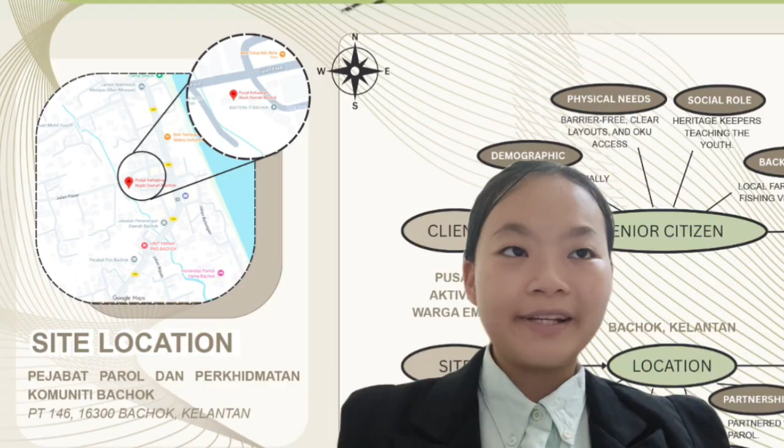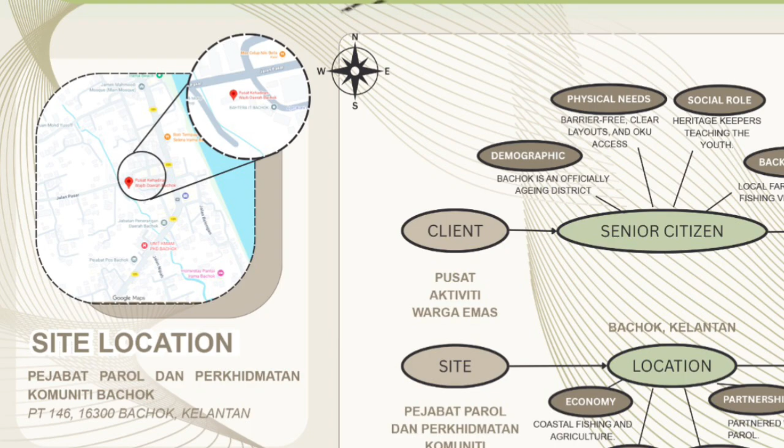Today I am proud to present my project, The Resonance of Life, a proposed Pusat Aktiviti Warga Emas, PAWE, located in the culturally rich landscape of Kelantan. Our site is at the heart of Bachok, Kelantan. Here, it's near the Pusat and the facilities in Bachok. My client is Pusat Aktiviti Warga Emas.

As designers, we often look at the built environment through the lens of modern progress. However, this project addresses a critical demographic shift, our aging population, and the profound need for spaces that foster dignity, community, and active aging. This facility is envisioned as a multi-generational

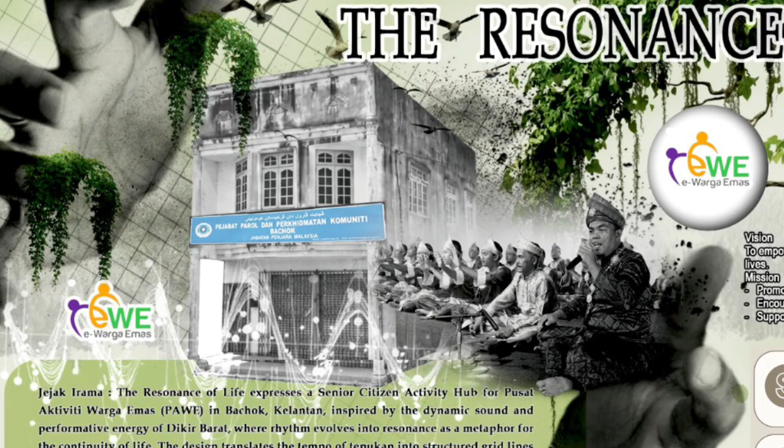community-led oasis. Our conceptual framework anchors on eco-futurism and advanced computational engineering seamlessly blended into the cultural heritage of Kelantan. By doing so, the design establishes a rhythmic dialogue between nature, human interaction, and traditional performance. The name, The Resonance of Life, represents a continuous, echoing relationship between the building's users, the natural elements, and the community at large.

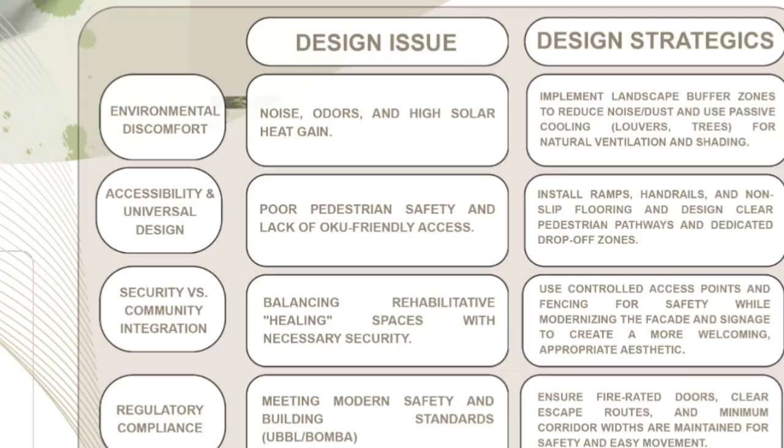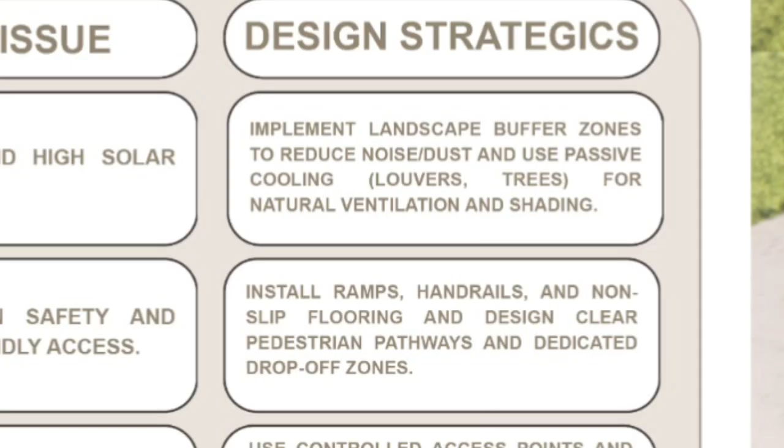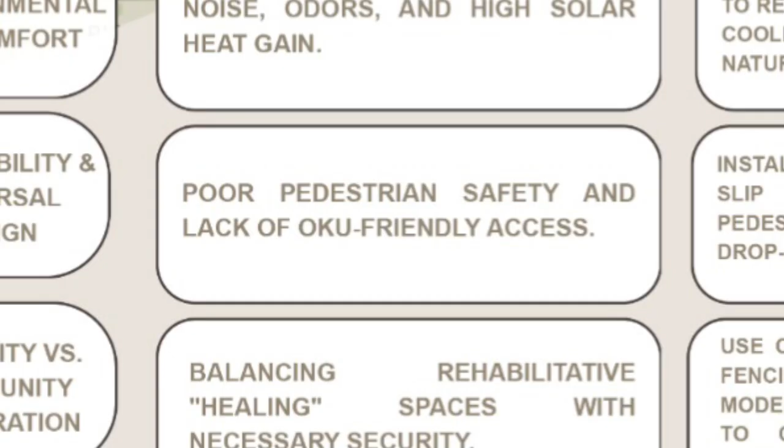Design issues and design strategy. For the design issue, there is environmental discomfort because the Pusat and the facilities are nearby, so there is noise, odor, and high solar heat gain. So we propose to implement landscape buffer zones to reduce noise and dust, and use passive cooling, louvers or trees for natural ventilation and shading. Accessibility and universal design: poor pedestrian safety and lack of OKU-friendly access. The strategy is to install ramps, handrails, and non-slip flooring, and design clear pedestrian pathways and dedicated drop-off zones.

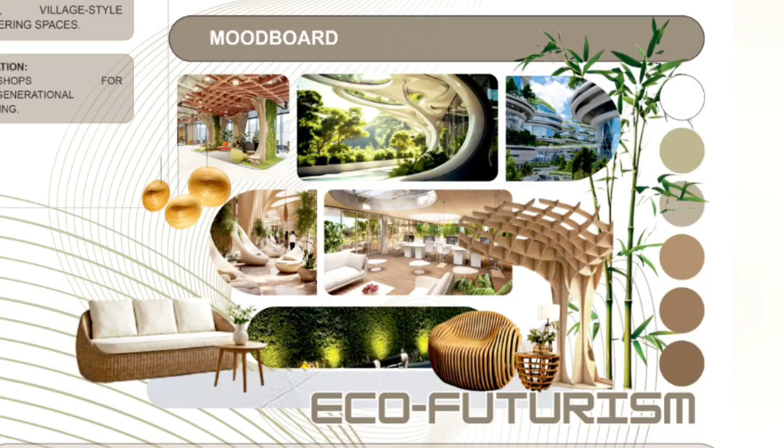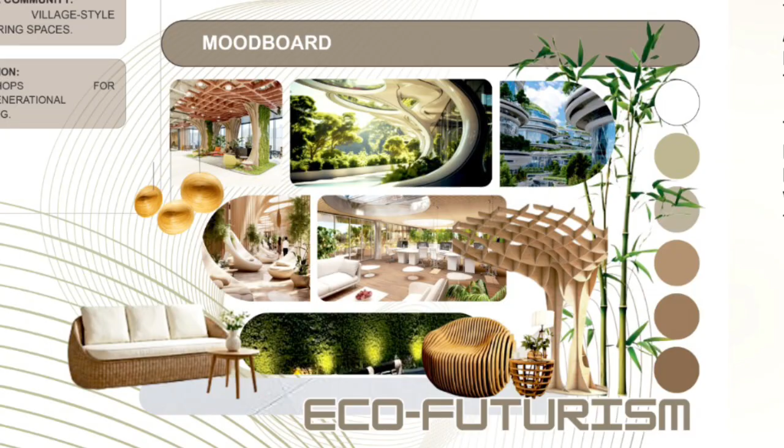Moving into our mood board, we're using natural colors, which are white, green, and brown. That is our main color scheme. In interior furniture, we're using bamboo and also parametric timber. I chose bamboo because it is flexible and easy to curve into organic shapes, mimicking the sound wave, and it is easy to find in Kelantan. The parametric timber wood can create curved shapes and also grid shapes, as in my conceptual model. Tempered glass was chosen because it can connect the people inside with the exterior landscaping.

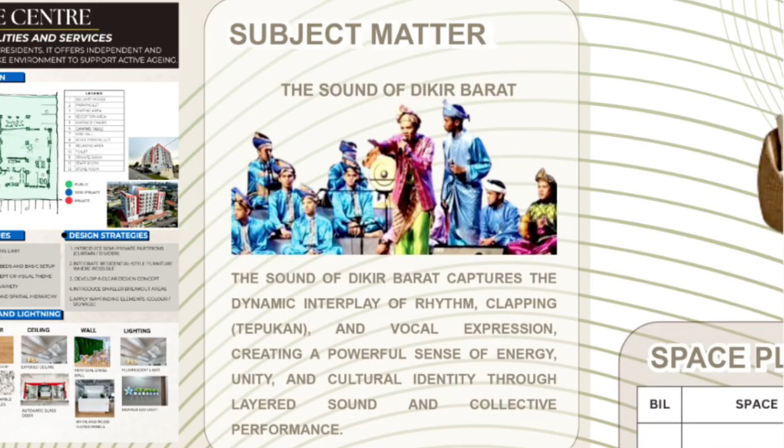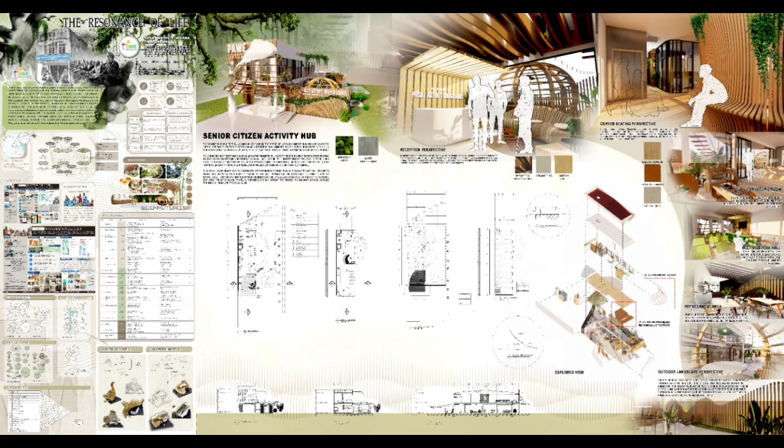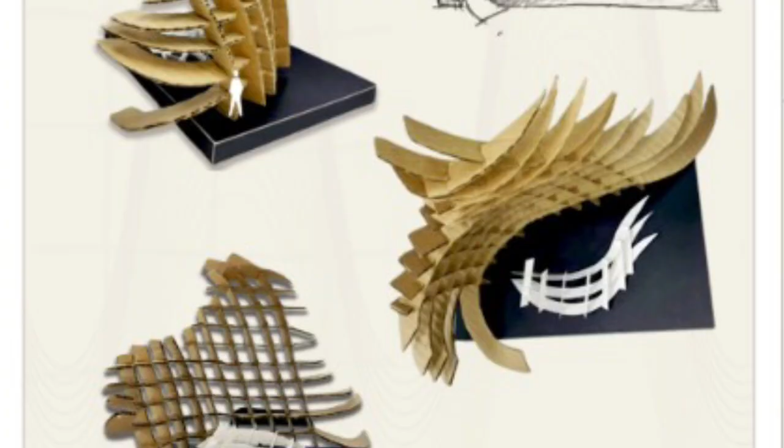My subject matter is the sound of Dikir Barat. The sound of Dikir Barat captures the dynamic interplay of rhythm, clapping, tepukan, and vocal expression, creating a powerful sense of energy, unity, and cultural identity through layered sound and collective performance. To truthfully ground the Resonance of Life in Kelantanese culture, the physical form of the building is derived directly from the intangible heritage of traditional performance. Especially, we look at the ritual of rhythm, translating the physical and acoustic energy of clapping into structural architecture.

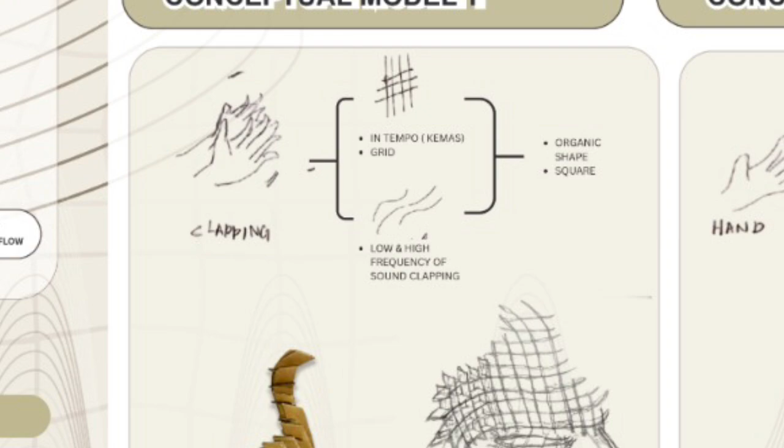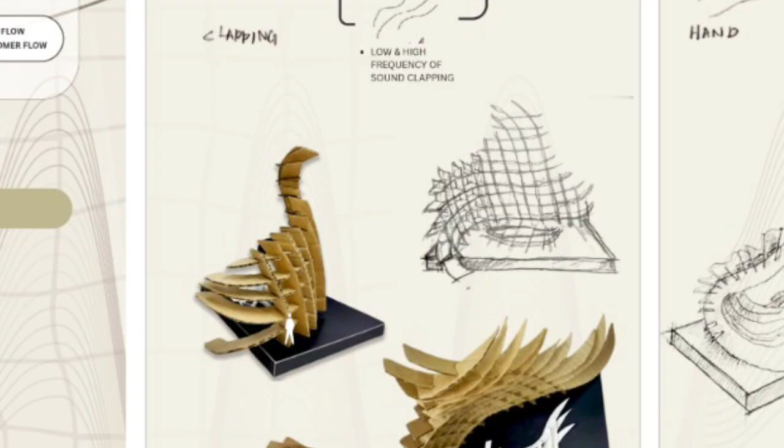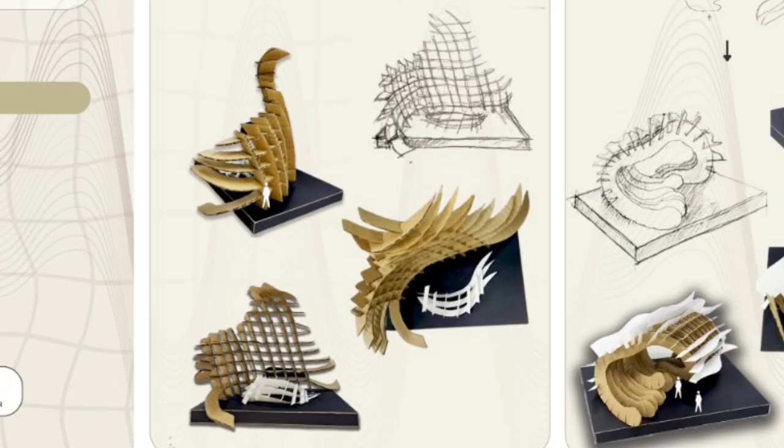In conceptual model 1, we map the low and high frequencies of sound waves from clapping onto a structural grid. This captures the concept of in-tempo atau kemas, creating a dynamic field composition where organic layered timber ribs manipulate spatial depth to mimic the rising and falling cadence of music.

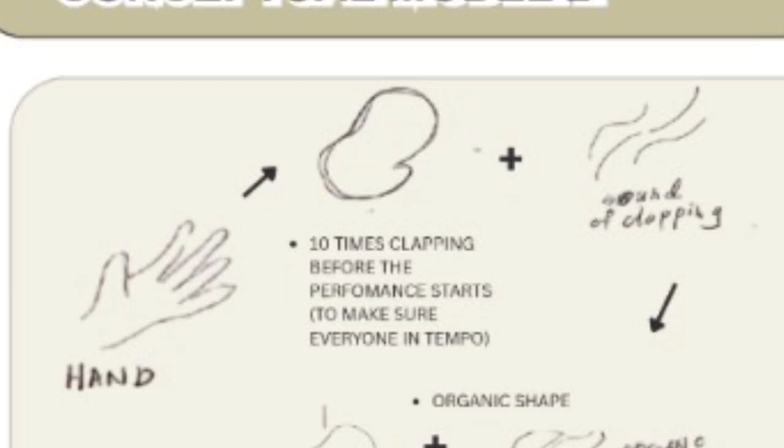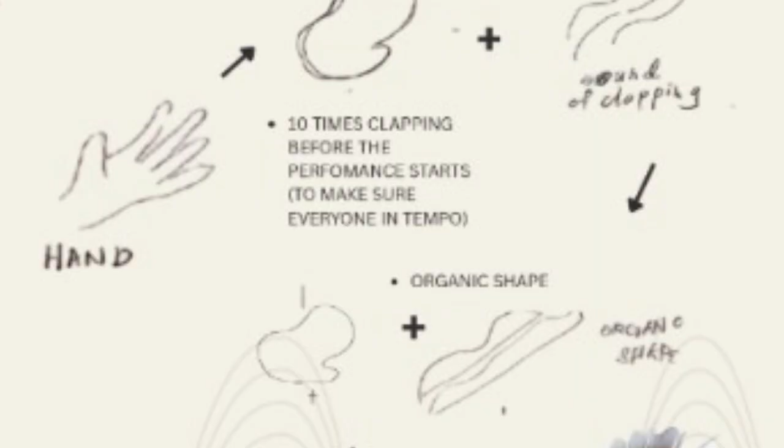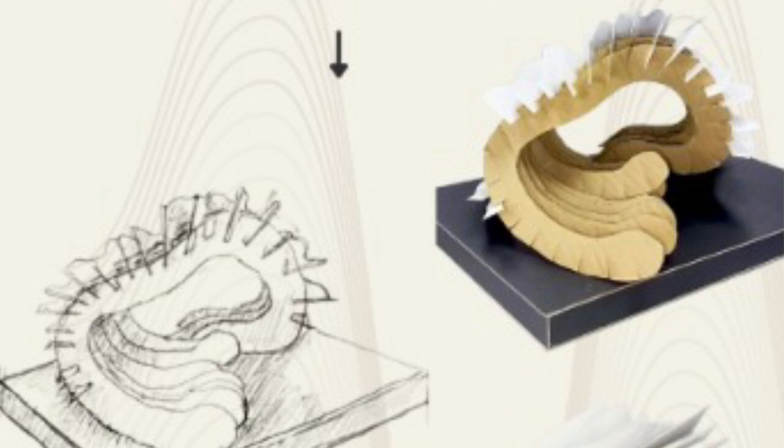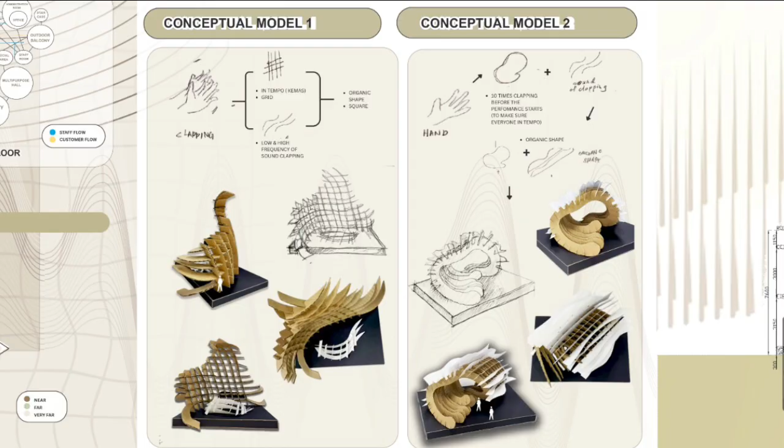In conceptual model 2, we focus on the performance ritual where dancers clap 10 times before a performance starts to synchronize their tempo. We extracted the form of the cupped hand and the unfolding path of a sound wave. This generated a sweeping organic shell structure wrapped in a rhythmic series of timber arches and a white skin. These two models directly dictate our final building envelope, turning the invisible resonance of cultural performance into an eco-futurism shelter.

For our case studies, we have Harvester Care Center and Joo Chiat Social Club. Joo Chiat Social Club has also faced the same issue. It is a good case study.

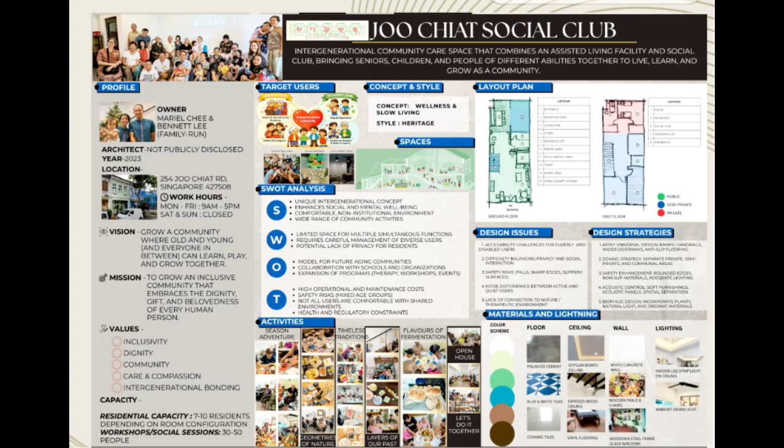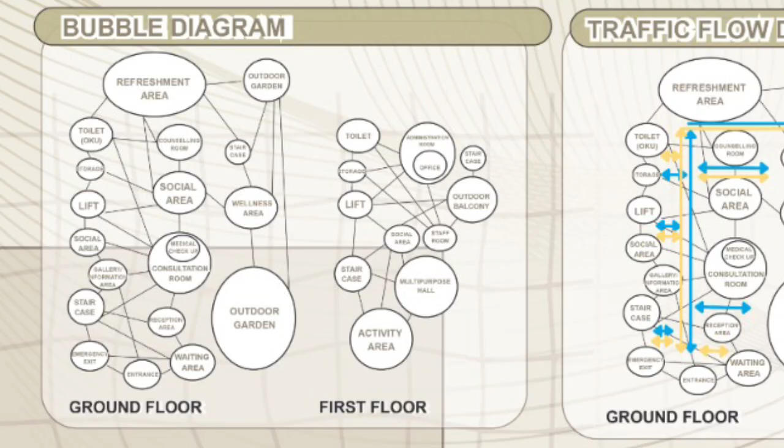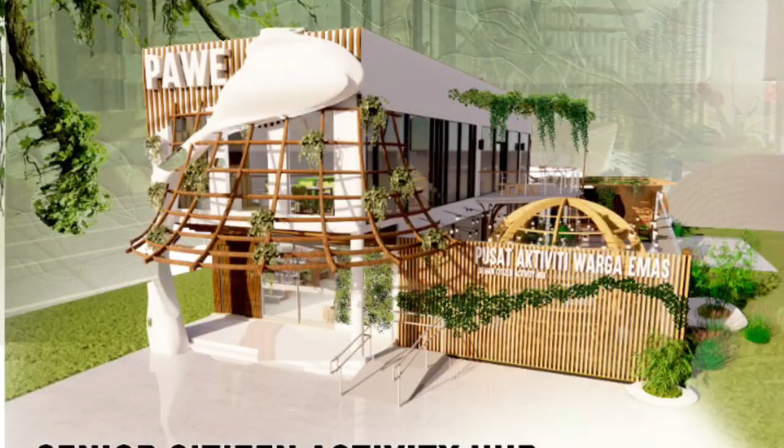Moving into the physical architecture, let's explore the Senior Citizen Activity Hub. The design addresses the spatial experience starting right at the entrance porch threshold. Vehicle access is positioned right at the front of the building, where visitors can park directly in front of the primary entrance or use the dedicated drop-off zone.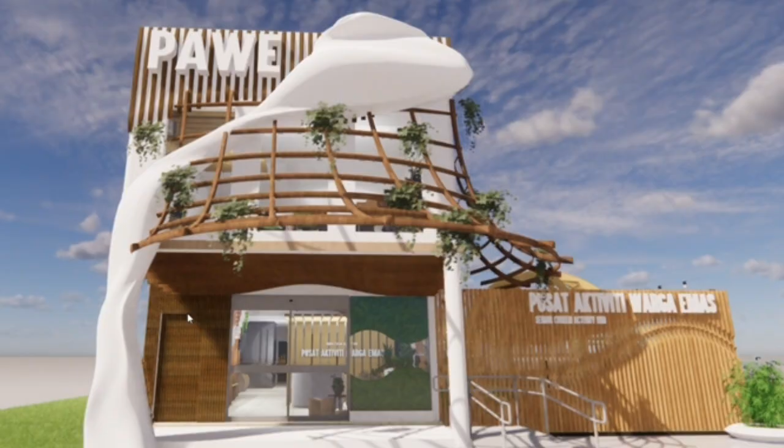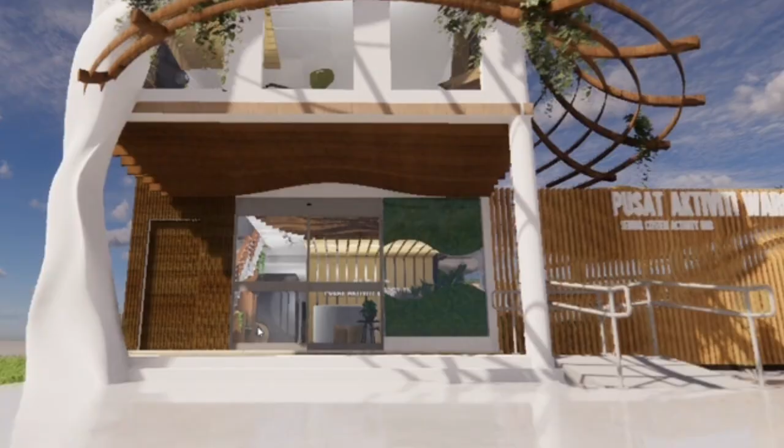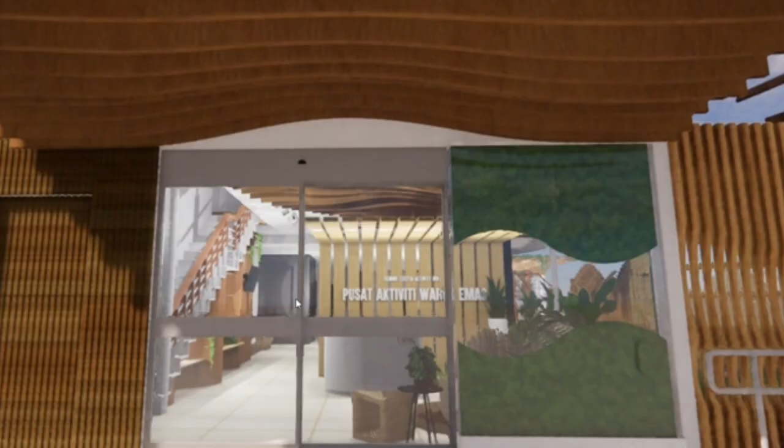Here, the immediate transition threshold is defined by our parametric timber acoustic damping zone. The moment a visitor drops off and steps out, they are introduced to our first spatial exhibition, a curated side niche showcasing intricate, computationally optimized parametric timber work that creates a rich sense of architectural depth.

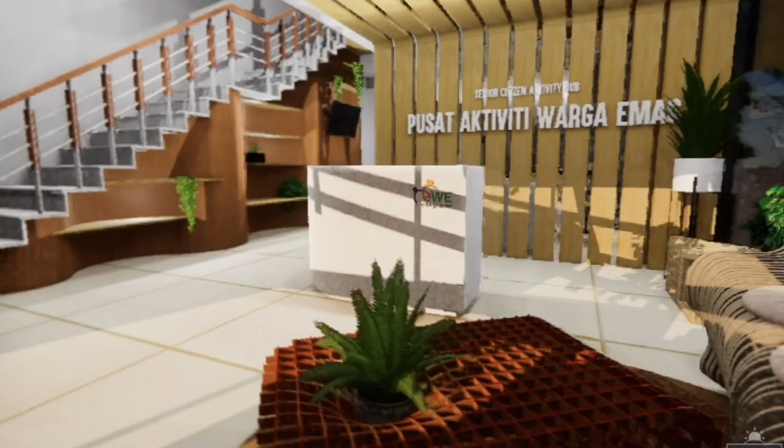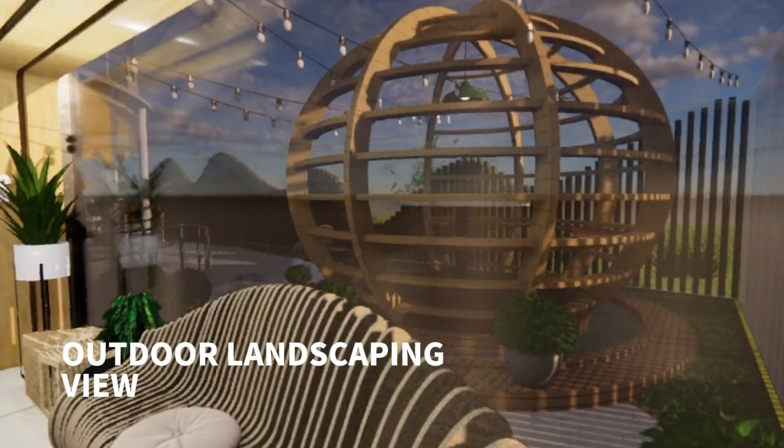Looking straight ahead from the entrance, the visual axis lands directly on the reception area. Positioned on this side is a dedicated waiting zone right in front of reception. While sitting here, visitors can directly see through the gallery information wall with full height tempered glass, letting them look straight up to the beautiful landscaping and blurring the boundaries between interior and exterior environments.

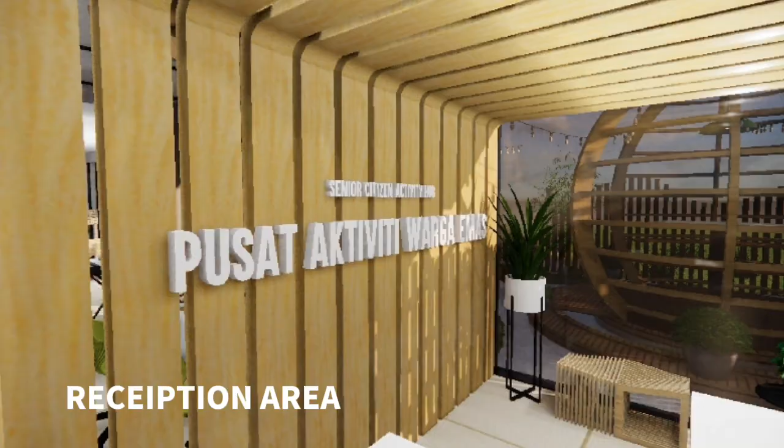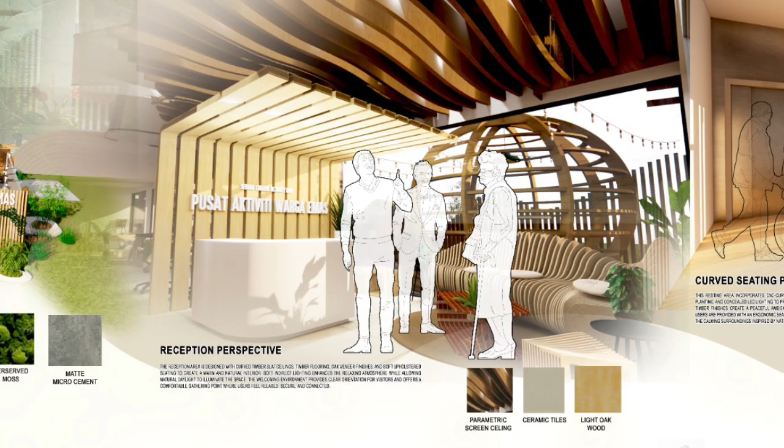The timber slat system behind the reception table also acts as a partition, strategically separating the public reception from the medical checkup and consultation room. The workflow here is highly efficient: visitors check in at reception and can immediately complete a medical checkup right next door, while waiting to proceed into their formal consultation with the doctor, sitting comfortably. While this medical zone requires a certain level of privacy, it is designed to feel open and welcoming rather than cool and clinical.

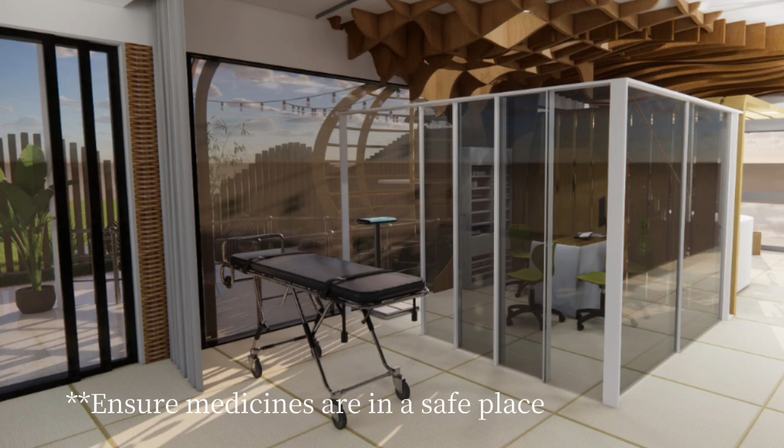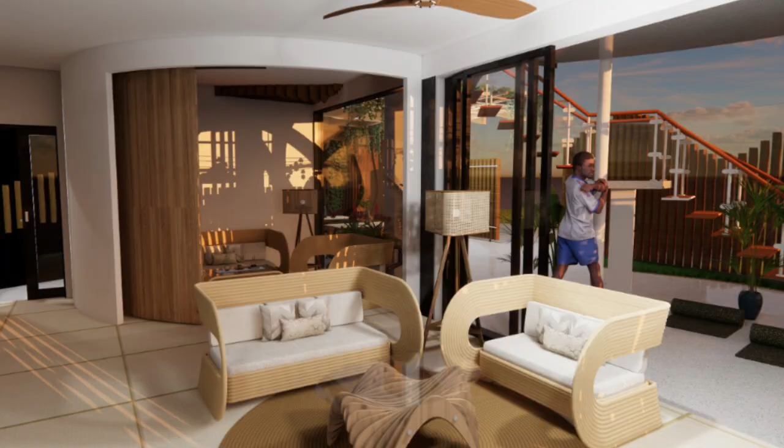Moving to our social area, this space is directly connected to the wellness area. We have integrated a large sliding door system so that when fully opened, the two programs merge into one massive, continuous social landscape. For vertical accessibility, a passenger lift is located right here.

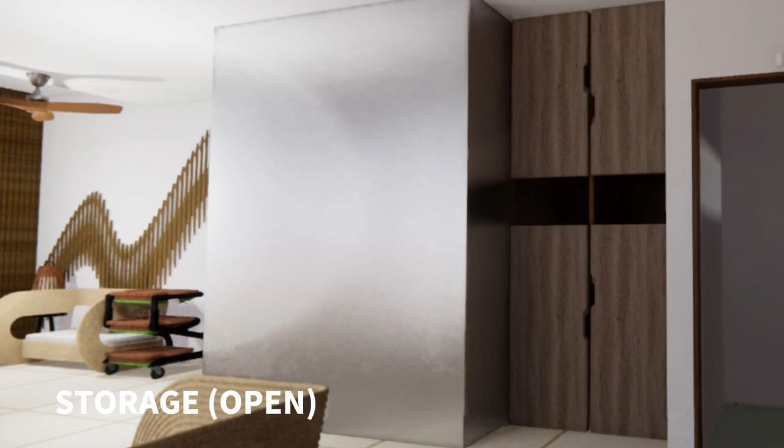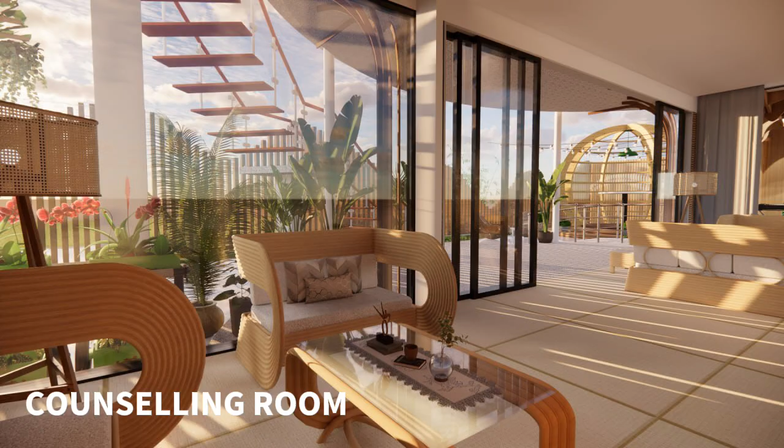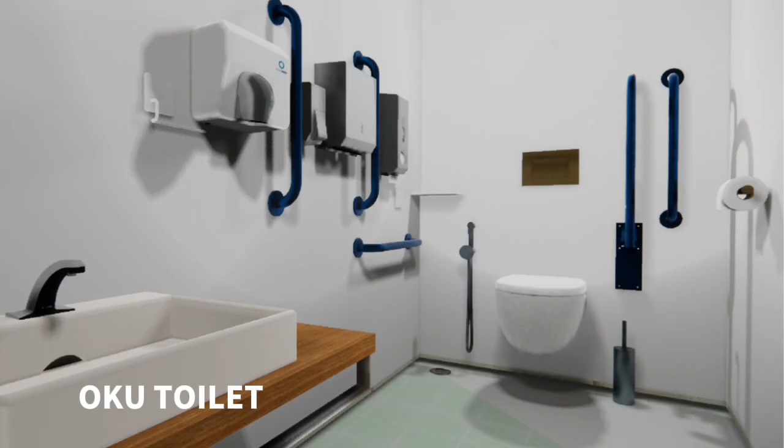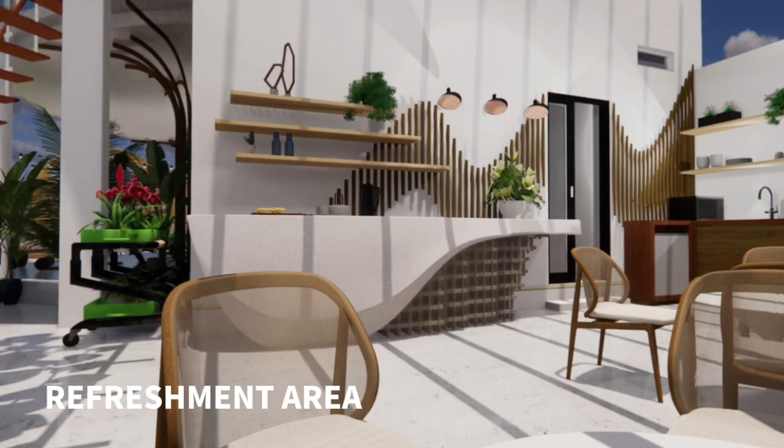Finally, the straight traffic flow brings us to the rear of the building, opening up to the refreshment area. For the operational staff, we have included a compact, highly functional pantry equipped with a microwave, refrigerator and mini refrigerator, and a dedicated service counter for food preparation and coffee brewing. The dining area itself features a dynamic layout with a mix of high counters and standard dining tables.

Adjacent to this, we have another transition zone. Visitors can sit here, enjoy a coffee, and look directly to the landscape.

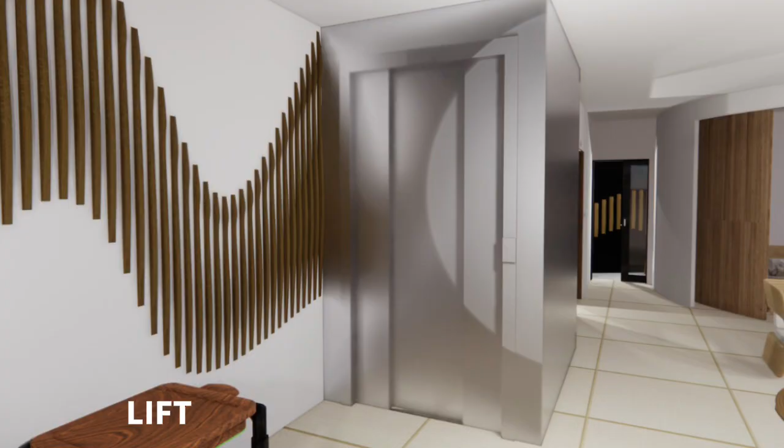Transitioning to the first floor, vertical circulation is provided by the central staircase and a passenger lift core. Both are framed by identical parametric timber curve seating, ensuring a cohesive aesthetic for all senior citizens. Behind this curved greeting zone is a private staff room for the administrative team.

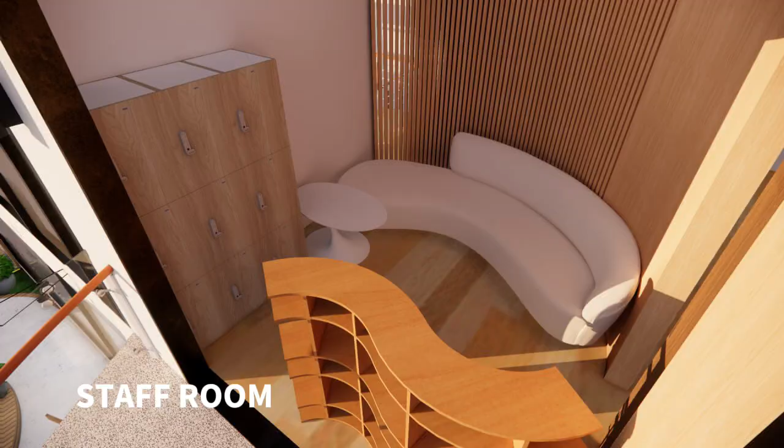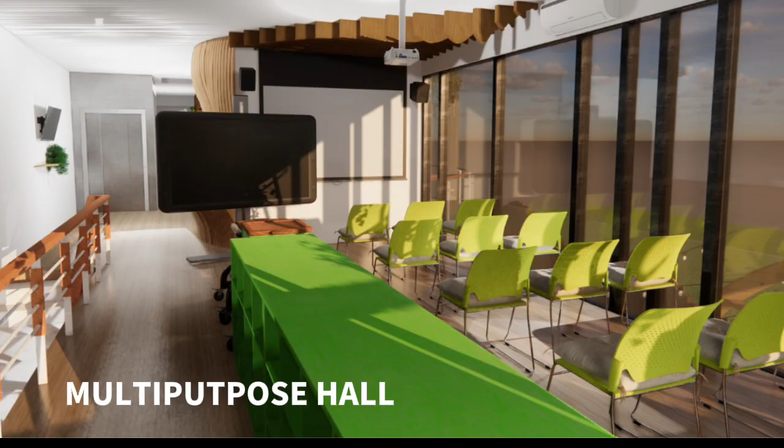The core of this floor opens into an expansive, flexible, multi-purpose hall anchored by a dedicated projection area for viewing videos and cultural films. They also provide talks and workshops.

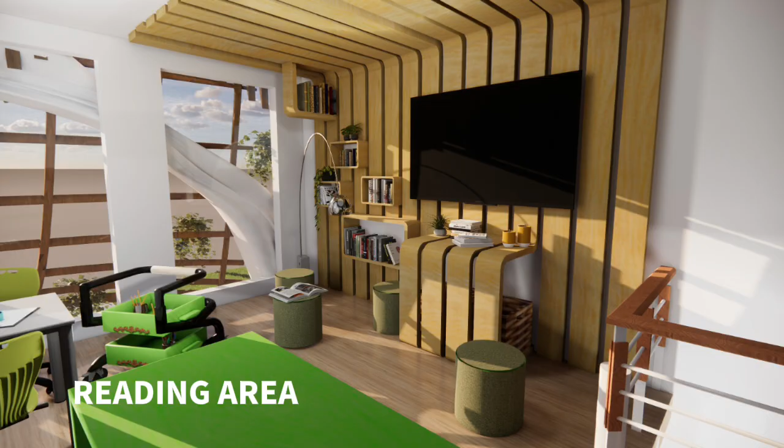Adjacent to this, the activity area splits into a reading zone with a lined parametric wall and a crafting zone featuring custom modular tables and a mobile storage trolley. A floor-to-ceiling parametric bamboo screen system embedded with hidden LED strips and climbing plants ties this creative zone together.

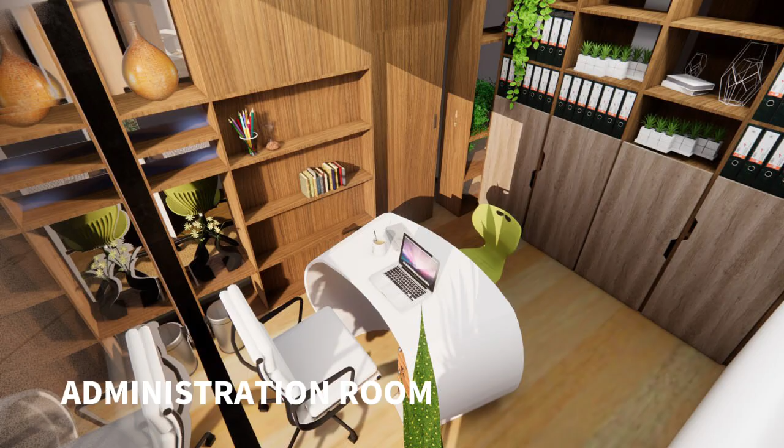At the rear sit the administrative wings, housing the main office and restroom connected by an experimental corridor with full height window walls. Positioned between the staff room and office is a threshold to the balcony, offering seamless transition options from the ground floor garden, lift or stair.

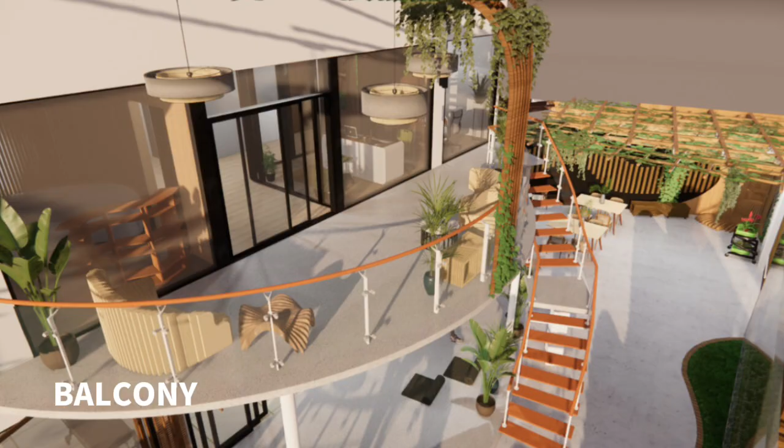The elevated open space is sheltered by a curved architectural ceiling shell, featuring a living canopy of greenery and a soil layer that acts as a thermal insulation barrier.

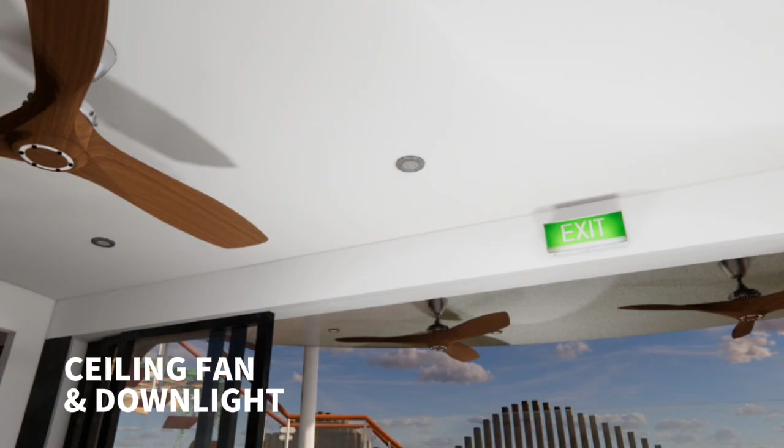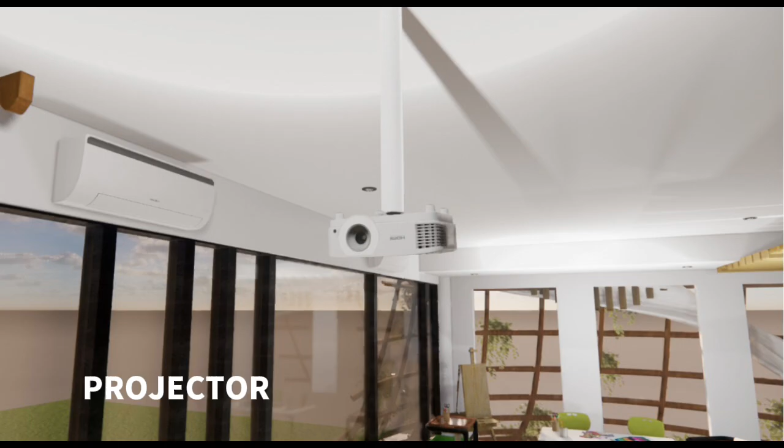On our RCP layer across both floors, mechanical and electrical components are tightly integrated. High efficiency recessed downlights are positioned to complement the filtered daylight and emphasize material texture. Meanwhile, ceiling mounted fans, air conditioning units, and emergency exit signages are coordinated into a clean, unified ceiling grid that balances safety with high-end eco-futuristic design.

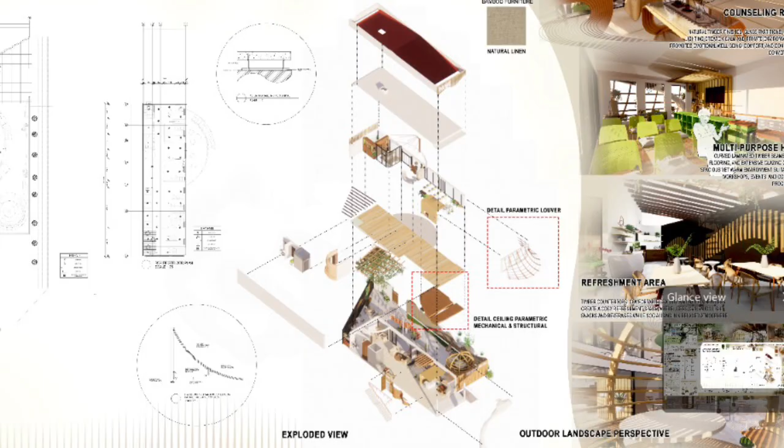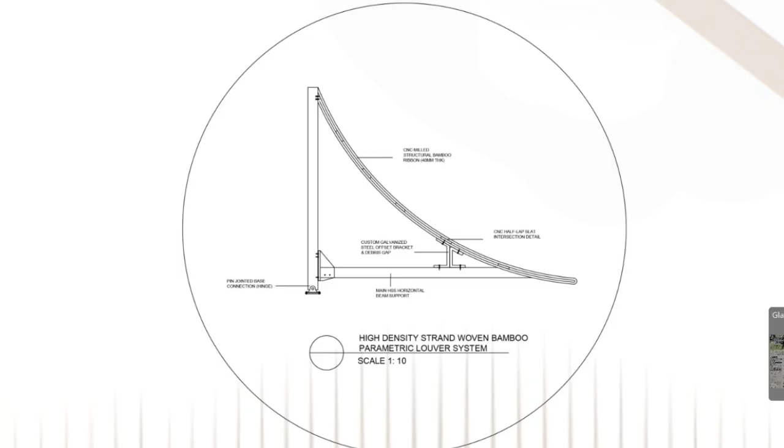The bamboo parametric louver system features 40mm CNC-milled structural bamboo ribbons with half-lap slat intersections. Its galvanized steel offset brackets create a debris gap, drawing the skin back to a main horizontal beam, ensured by a pin joint base hinge.